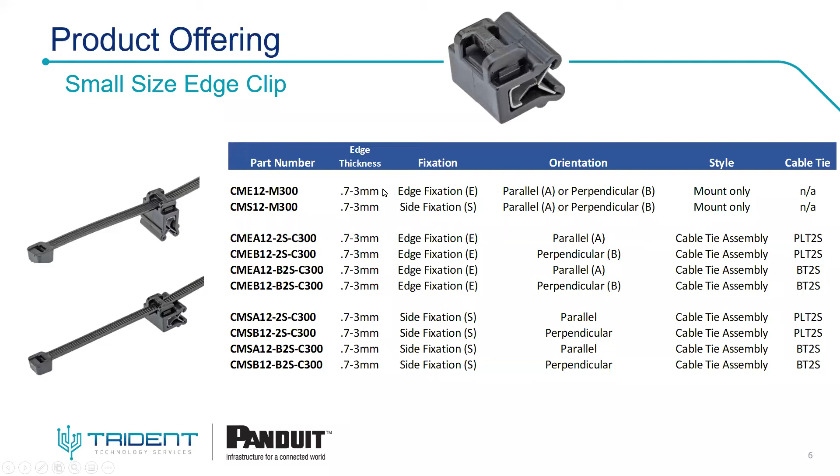And if I move to the large one, you see here that in this case, we are speaking about edge thicknesses of 3 to 6 millimeters. So you can see it here on the picture, the edge clip itself is larger. But again, you have it also in standalone version and in pre-assembled versions with PLT cable ties or barb tie cable ties.

In this case, you see that our standard pre-assembled cable ties are what we name the 2S. This means that these products have a length of around 200 millimeters when it comes to the cable tie. If you need shorter or longer cable ties, the best option will be to order the edge clips as a standalone and order separately the right or best possible cable ties for your application.

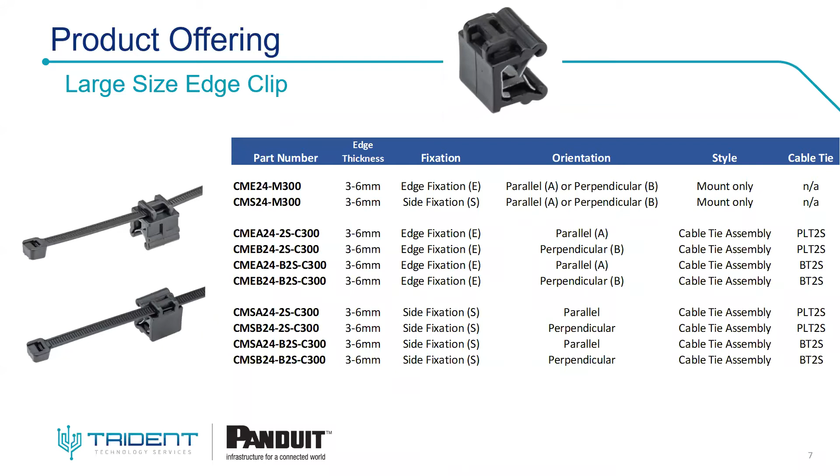So let us deepen a little bit more in the features of our edge clips. So you see here the standalone part highlighted on the screen.

So the idea was to show it also through video with you, but we have some camera issues, link it to bandwidth, or I don't know, but I will not be able to put the video on for the moment. I hope to be able to do it at the end of the presentation. Team behind the scene is working on that, but I cannot promise it to you. So I will try to do my best by highlighting the features here with the picture on the screen.

So let me say the first feature I would like to highlight is the versatile mounting. You see it here. In fact, due to the design of the bridge, you can introduce the cable tie horizontally, if you follow my mouse, or vertically. That means that you have 4 entry points on the bridge, on the edge clip, which gives you the ability to use one part for a lot of different applications, as I have mentioned for a few minutes.

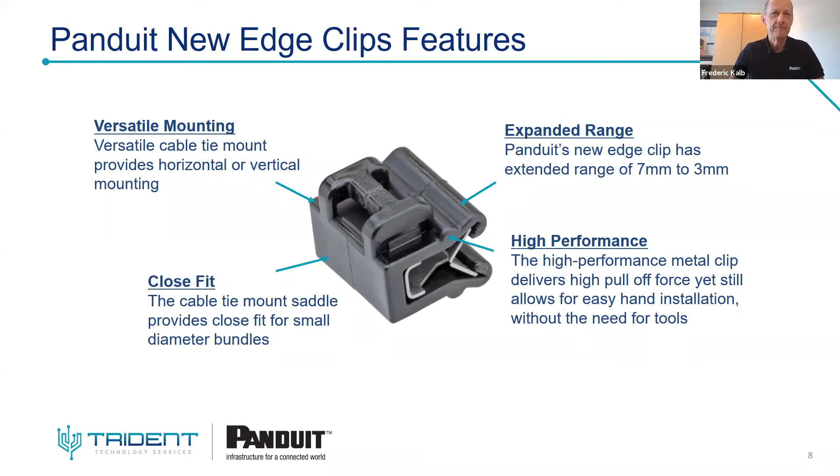Nothing is better as a demonstration, much more powerful than a lot of words. And to stay in the same approach, a video says more than a lot of words. Let me run a short video.

These are Panduit Edge Clips. They provide a quick and easy way to mount directly to a panel. No mounting hole, no drilling, no adhesive needed. These edge clips include a metal barb that is designed to sit and bite into the panel it sits on. That metal barb is housed by a molded housing, and the finished assemblies include a cable tie.

All right, so now I'm going to show you how easy it is to put this thing on. So I've got my edge clip, and here a 2 millimeter thick plate. I'm going to bring that over here just to stage it. And then that guy just sits right over here, and you're done.

When you want to capture a wire or cable offset from the edge in a parallel fashion, use the CMEA series. The CMEB series is for when you want to route wire perpendicular to the edge. For capturing a wire running parallel and adjacent to the face, use the CMSA series. For wire running perpendicular and adjacent to the side face, use the CMSB series.

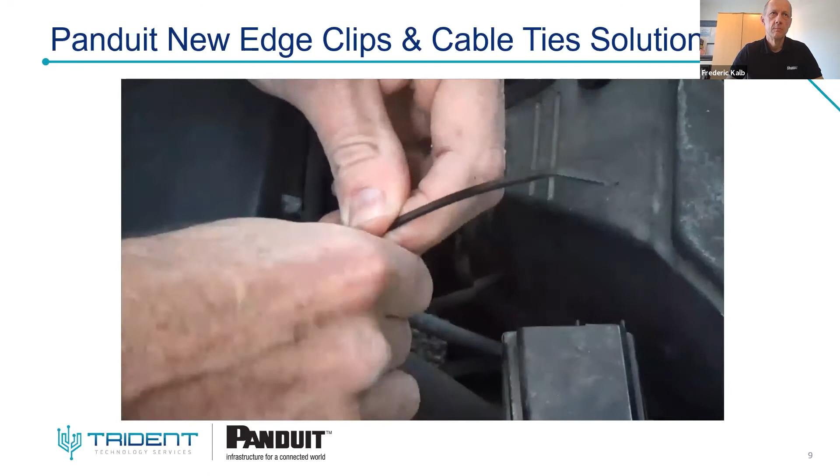Alrighty. Voila. Done. Got myself a nice connector. Take this old one out, and repair job done.

So as you have seen, even in some cases, you can repair your car with the edge clips. You see a nice application shown by Ray, one of my colleagues in the US. So even at home, if you have an edge and something to fix on it, edge clip can be a good solution.

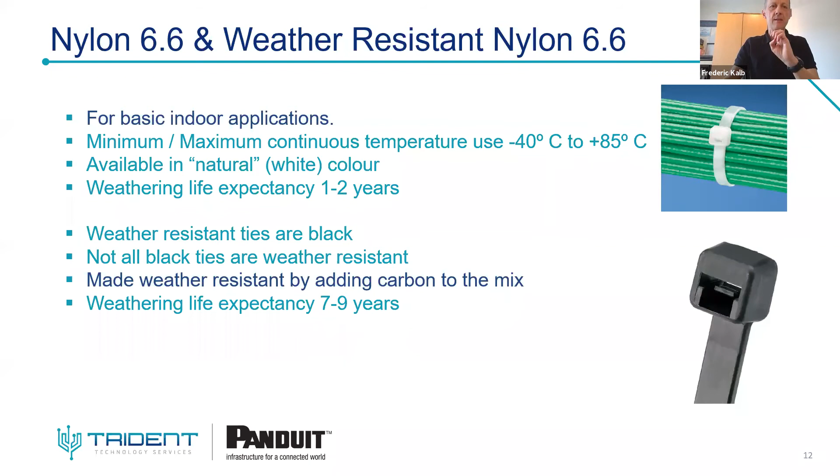So it's really important when selecting a cable tie to keep this in mind and choose a weather-resistant black cable tie, not only a black-colored one, in case you need weather resistance for outdoor applications. This is also important to compare apples with apples when comparing prices and features. This is one point I wanted to highlight because it's not so well known in the market, but at Panduit we really take care to bring the best solution for your application.

Still staying with nylon 6/6, you're certainly aware it can also be heat stabilized. This gives the material the ability to withstand up to 115 degrees Celsius, and at Panduit that means 24/7, not just peak temperature. The standard nylon 6/6 presented in the previous slide is given to withstand up to 85 degrees Celsius. So as soon as you go above 85 degrees Celsius, it's better to select the heat stabilized version.

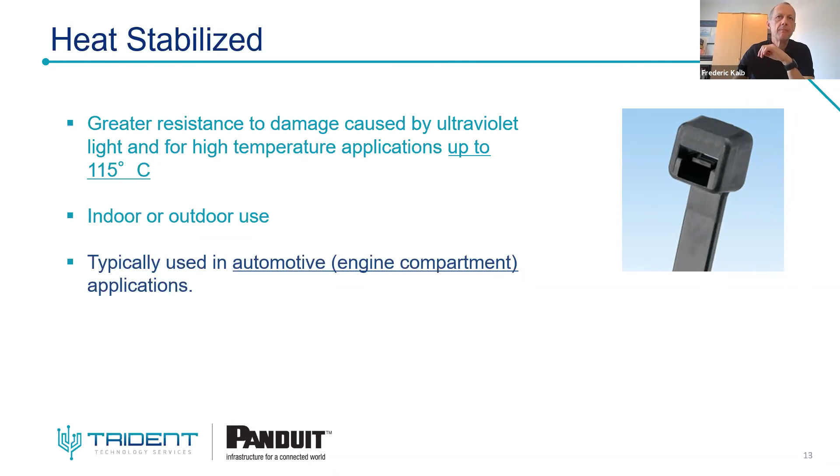Sorry, what happens? Let me go there.

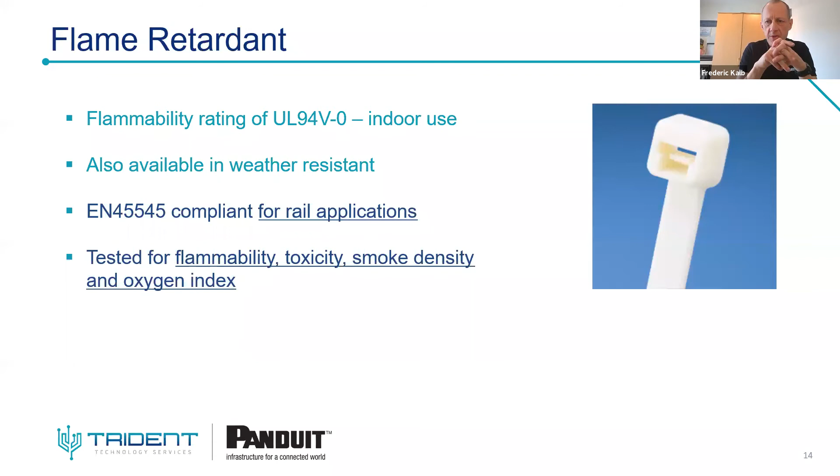So due to this, they are mainly used, but not only there, in nuclear applications and applications where chemicals play a large role. So chemical plants, in some cases, in some buildings, in some applications, people select Tefzel cable ties due to the specificity of this raw material.

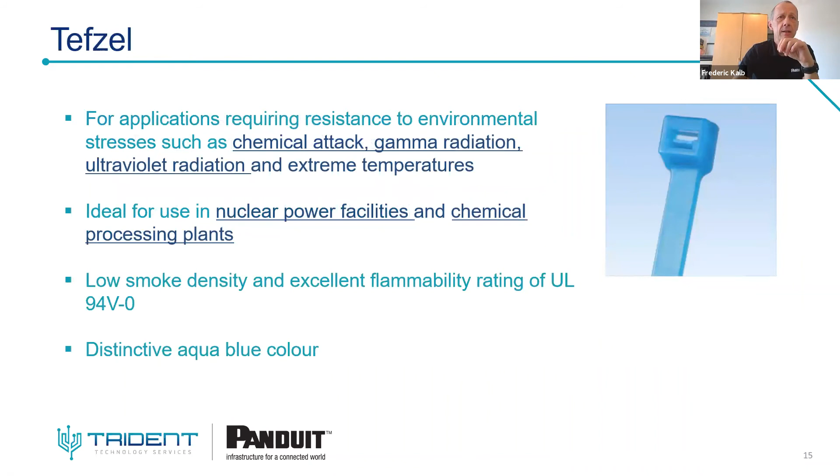Another chemical resistant material is polypropylene. So it's not blue in this case, it's green. Green is the natural color of polypropylene, but you can also find black polypropylene cable ties and even, let me say, blue, but really light blue, not so nice a blue as the Tefzel. Perhaps I have a picture in 2 slides about it that I can show you. So let's go back to polypropylene.

Polypropylene standard is green colored, but you can also get black ones, because in this case, again, we add carbon in order to make it more weather resistant than the standard polypropylene. So why a second solution for chemical resistance? First of all, it's linked to cost.

Polypropylene is a lower cost option compared to Tefzel, because Tefzel is really a premium material for which you need a certain level of tooling to make the molding of the cable ties. So it's a challenging process, much more than polypropylene. This plays on the price and the cost of the solution.

And also polypropylene resists better than Tefzel in some cases, like hydrochloric acid, for example, or salt environments, for which polypropylene is really a great solution. Another great application for polypropylene is in the milk industry, everywhere where you have lactic acid, because lactates attack nylon 6/6, for example, but polypropylene offers a much better resistance in these applications.

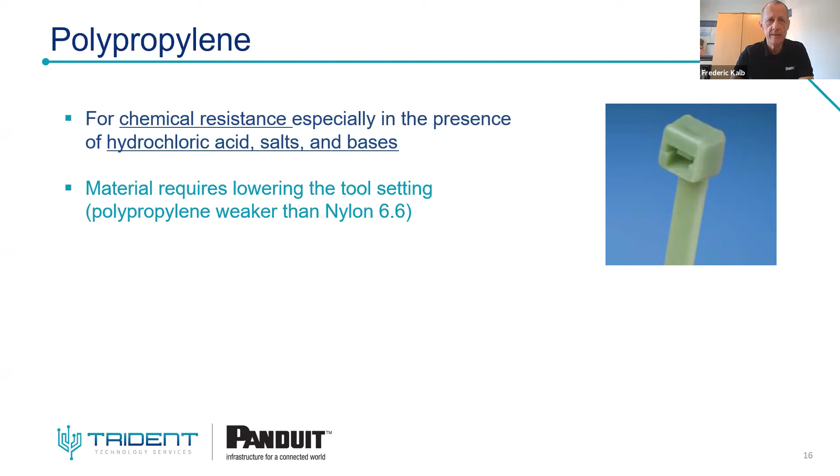So perhaps you have heard about PEEK. PEEK is a material which is used not only for building cable ties; it's used everywhere where you need a very high temperature resistance, because PEEK has the ability to go up to 260 degrees Celsius on a 24/7 basis. Not just peak, 24/7 temperature resistance. So this is the reason why PEEK is the best solution in every application where you face such high temperatures.

PEEK is used in aerospace applications, in other high temperature fields, close to some engines, in some trucks. So it's really a specific material for high temperature applications. We have cable ties in PEEK, but we also have some accessories in PEEK going up to these 260 degrees. So if you face such applications, think about PEEK and about Panduit, and please contact us.

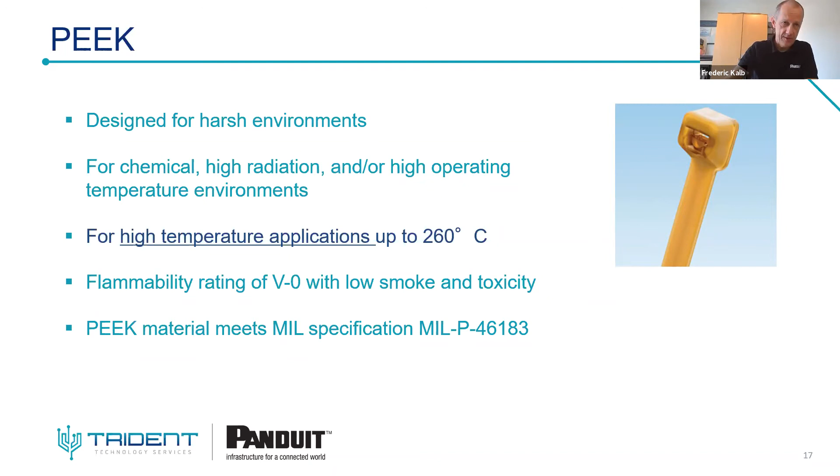Going back to a nylon cable tie, speaking about nylon 12, which is a different polymer from nylon 6/6. So why nylon 12? In fact, nylon 12 offers a high resistance to moisture and also a high corrosion resistance. So it's really a good play for outdoor applications, especially in oil and gas environments, due to the fact that the lifespan is considered longer for a nylon 12 cable tie than for a nylon 6/6 one.

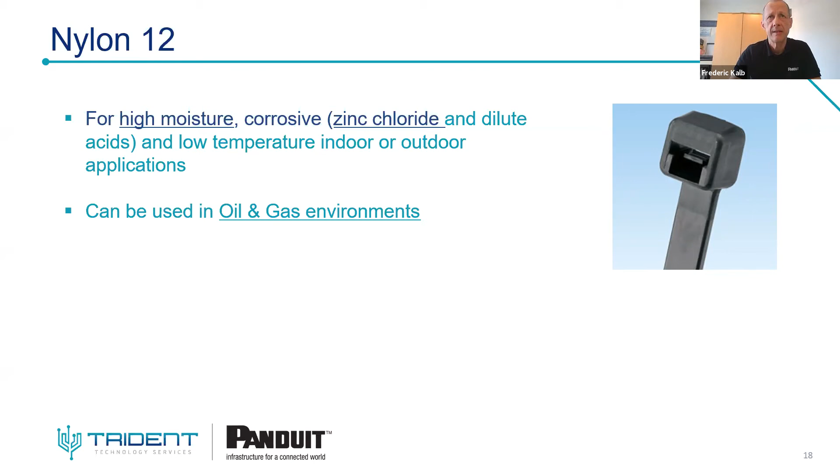And last but not least, we also have metal detectable cable ties. So this is another material. Let me say it's in the mood of the time due to what we are living today with the COVID situation, and also with safety in the food industry.

Because the food industry doesn't like to find plastic parts in the end product. It plays against the reputation of the food and beverage companies. So it's really a market. It's still a niche market, but there's more and more interest from, how can I say, users for these kinds of ties.

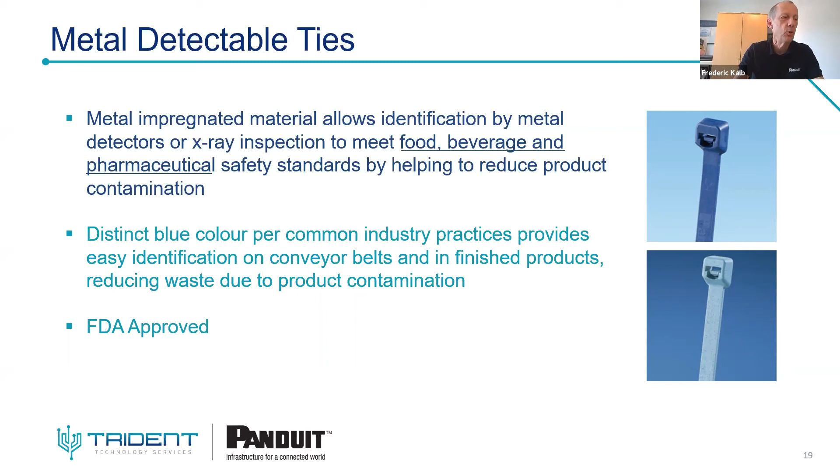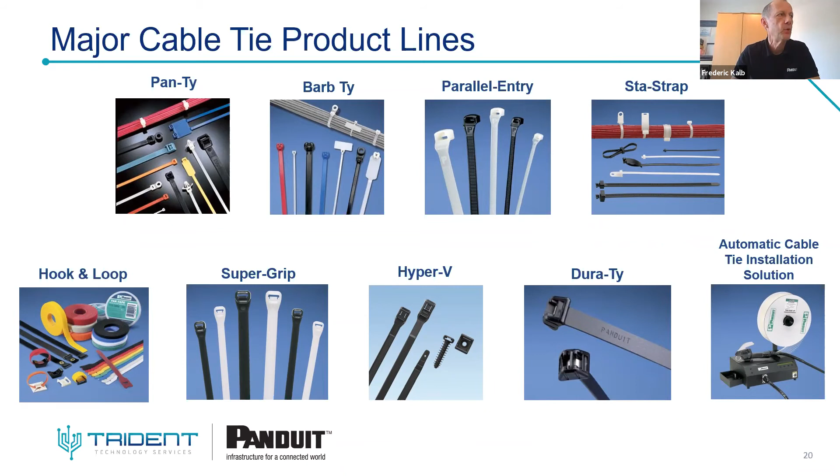You see here the different cable tie types. I will not go too deep here, but you see that we have a large offering, and that you can reach out to us or to the Trident team if you have questions and needs for these different types of cable ties.

And now we are getting to polling question 2. Do you use cable ties other than nylon 6/6? So 6 responded yes, and 7 responded no. Thank you for your answers. Balanced answers, close to 50-50, 6-7. But it highlights effectively that nylon 6/6 is not the only solution that you are using for your application.

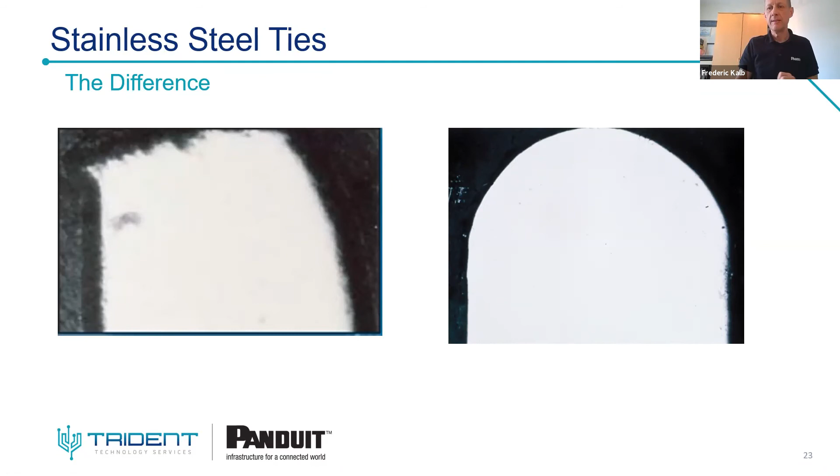I experienced it myself over my 20 years at Panduit, and even before in other industries. There is really a big difference between our cable tie and those of some of our competitors, and this plays again into efficiency, the theme of today, because efficiency also means less risk and fewer injuries.

To install all our cable ties, the plastic ones and the metal ones, please be aware that we also have installation tooling to help you get the best result when you put the cable ties on your applications. Best results in terms of tensioning, repeatability across all the cable ties, and that's why we call them ergonomic, because the latest version of the tool has really been improved to increase safety for operators, since it reduces shocks in the hand and vibration in the arm when you put the cable ties in place.

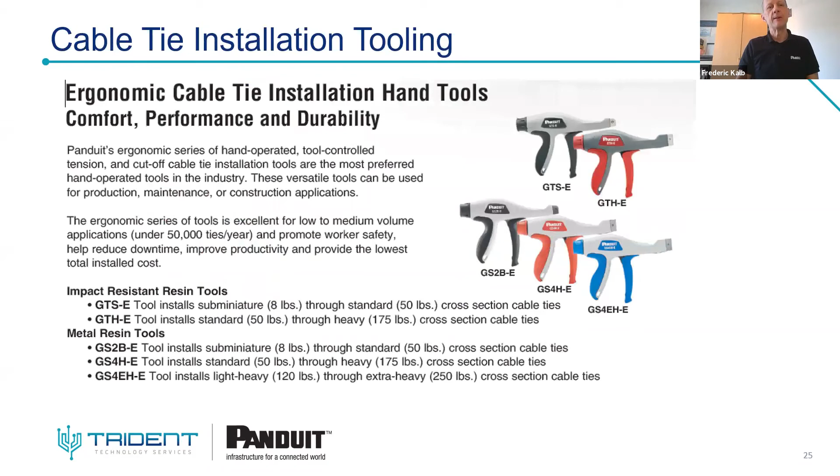And I think it's the last polling question, Rola. Yes, it is. So the question here is, are tools with tension control used by your operators? So let's see who answered and what is the percentage here. So we have 60-40, Frederic. Yeah, looks like tools with tension control are used by 60% of the people in the audience. So thank you for that, and it shows the interest for tooling. So perhaps a good thing to discuss in a different session.

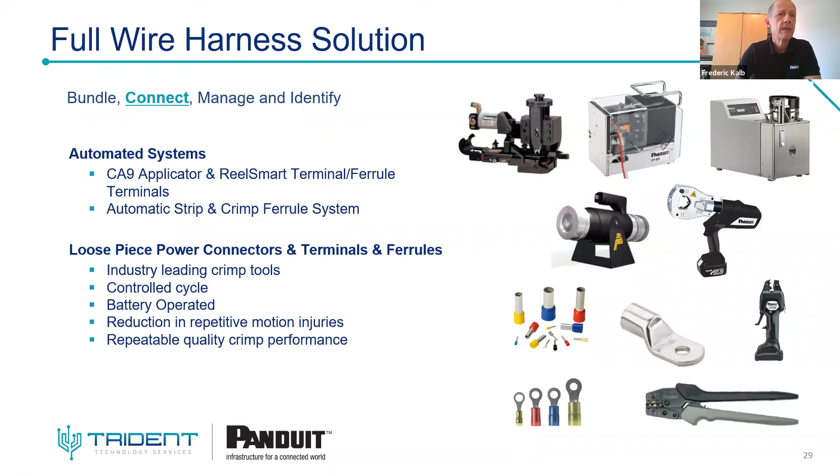And the third part is around manage and identify. Manage by using abrasion protection products, heat shrink, spiral wrap, wiring ducts, innovative wiring ducts, and also a large offering going from printers to software to labels and ink for all what's around identification. So you see that outside of edge clips and cable ties, we have a lot more to offer for your needs. This was my last slide.

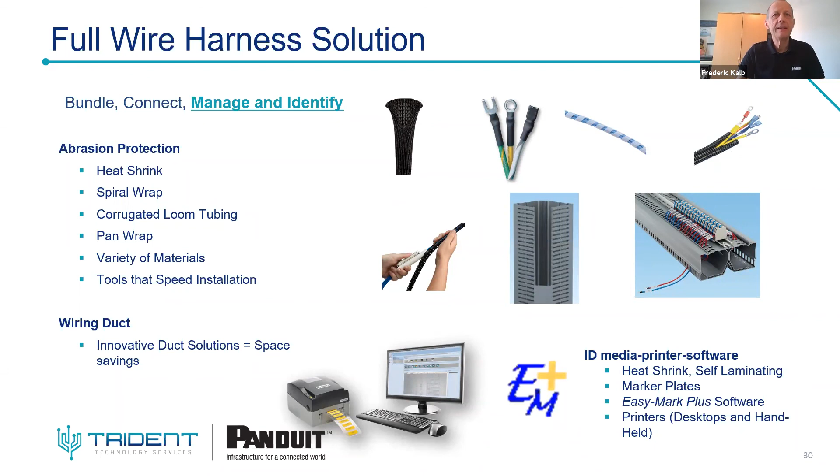Let's move to the question part of the session. We have 2 minutes, so I hope you can stay 1 or 2 minutes more. It depends on the number of questions that my colleagues got. Baban, Rula, Amal, do you have questions for me? Thank you, Frederic, for your presentation. I would just like to ask you, do the Panduit Edge Clips meet specific standards?

So the edge clips effectively are in line with the EN 45545 standard, the one I have mentioned for the rail industry, because edge clips are used in a large number in such kind of applications. So we have fulfilled the test for this standard. But in case of need, if you need a different standard, let us know. We can run tests. For your information, the raw material from which the edge clip is built is the same as the heavy duty nylon 6/6 raw material mix. So we can get certifications to other standards if needed. The one which was required by the market is the EN 45545, the rail one, and we fulfill it without any issue. I hope that answered the question. Yes, thank you. I do have another question.